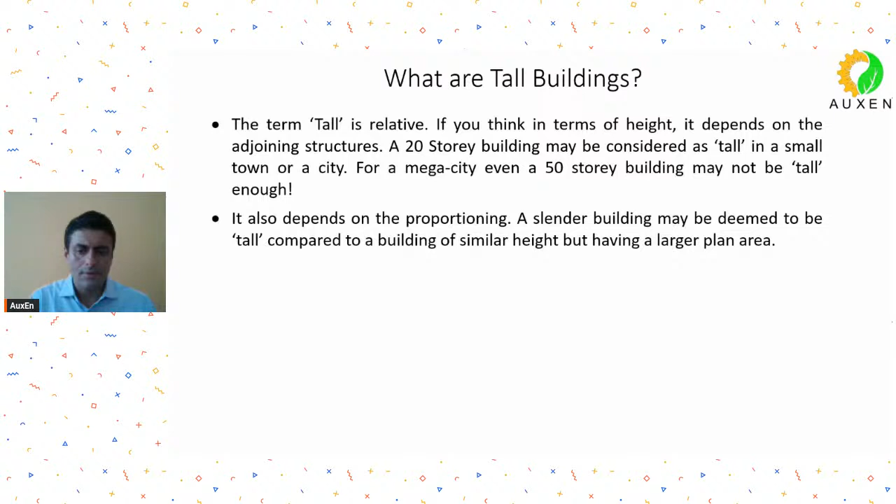Another set of understanding people have of whether a building is considered tall is whether or not any special system is being used in the building. What is the meaning of special systems? So you might have heard about damping systems to dampen the wind and seismic responses. So whether or not you are using any special systems may also sometimes decide whether your building is tall. Although I don't agree a lot with this particular definition as such.

The most important and, I would say, relevant definition will be that usually we will call a building tall when the lateral loads start to dominate over your gravity loads. So this, I would say, is a more relevant and more appropriate term when it comes to tall buildings.

So usually we will call a building tall when your lateral loads dominate. The two lateral loads that we will have to consider for our tall structures are wind and seismic. Obviously there will be other loads also, there can be some snow loads or other effects, but mainly we will be sticking to the wind and seismic effects. So we call a building a tall building when the lateral loads start to dominate.

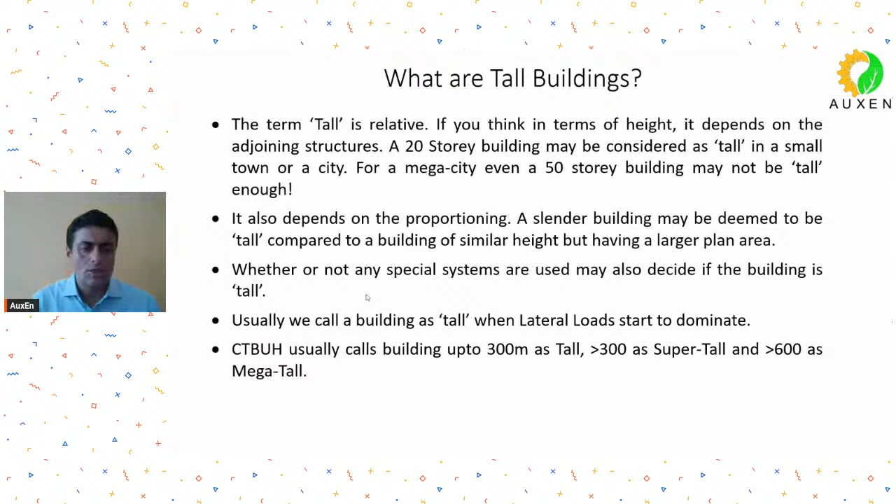Now there is a council called the Council on Tall Buildings and Urban Habitat, CTBUH. It makes some further classifications, and it says that up to 300 meters it calls buildings tall buildings. Then, more than 300 and less than 600, it calls them, I don't know what. Yeah, super tall. So if you have a building between 300 and 600, it will call it super tall, and more than 600, it usually calls them mega tall.

Okay, so this is a classification that has been put forth by the Council on Tall Buildings and Urban Habitat, CTBUH. You must visit their website. It is quite informative, and it gives you a lot of data about the tall buildings that are there in different countries right now. It also gives you a lot of data about what structural systems were used, who were the structural designers, who were the architects, some pictures, etc. So you may be interested in visiting their website also.

So important for us will be that we will call a building tall when lateral loads begin to dominate, and not just lateral loads, but the dynamic effects of lateral loads begin to dominate. That is when we will call them tall buildings. And how are they different then? We have understood what tall buildings are, but how are they different?

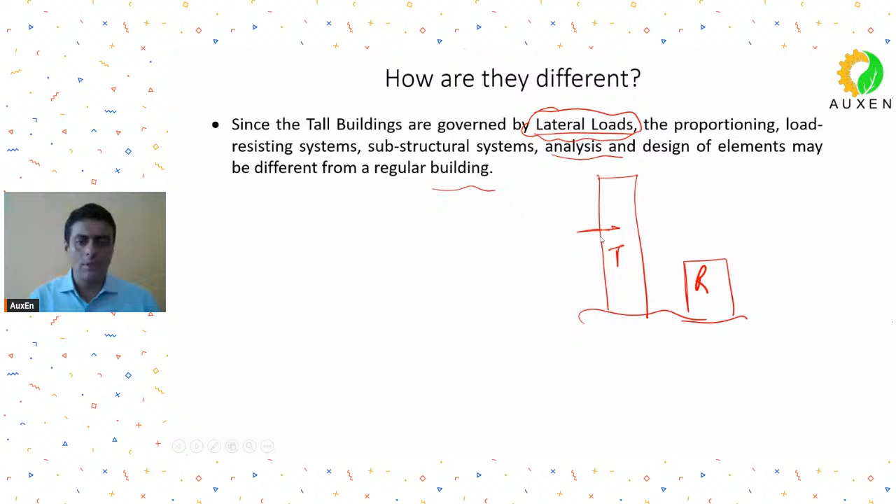So mostly when we are doing any regular structure, it is the strength design that is more important, isn't it? By strength design, I mean how much stress levels we can permit, what size we have to provide so that the load is effectively taken. On that basis, we decide the sizes, reinforcement, etc. So generally, it's the strength design in regular buildings that is important.

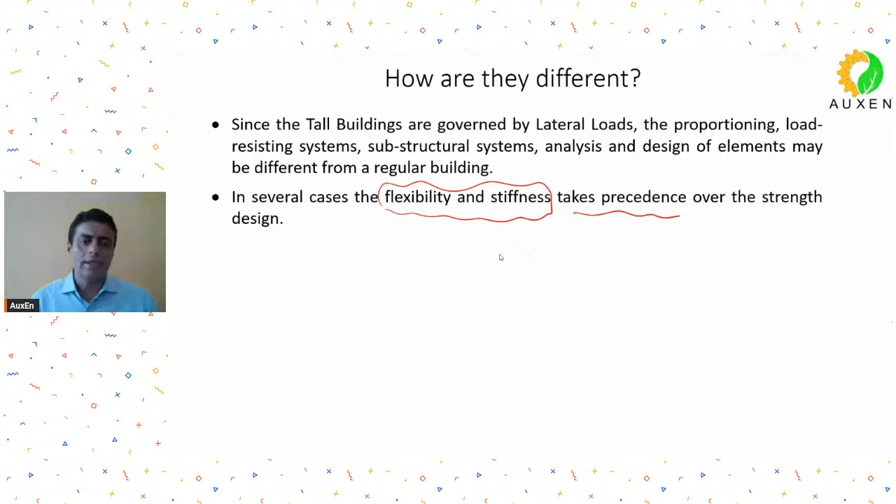But when it comes to tall buildings, the flexibility and stiffness of your structure may sometimes take precedence over the strength design. That means that sometimes you may have to provide sizes just to satisfy issues related to, let's say, floor acceleration, or drifts, displacements, etc. So the flexibility and stiffness design may take precedence over the strength aspect of your design. And as I told you, in tall buildings, the dynamic effects will become more important, and they have to be carefully evaluated and considered.

How are tall buildings different? So you may have to think about materials having greater strength, materials that have different properties, and materials that can be used for easier and quicker construction techniques. So for example, concrete, we may have to use higher grades.

So it's quite usual to see M40, M50, M60, M70 and so on, high strength grade concretes being used. You may see a lot of self compacting concretes being used in these types of structures, because of the large reinforcement congestion that you may get in those sizes.

Just give me a minute, I'll be back.

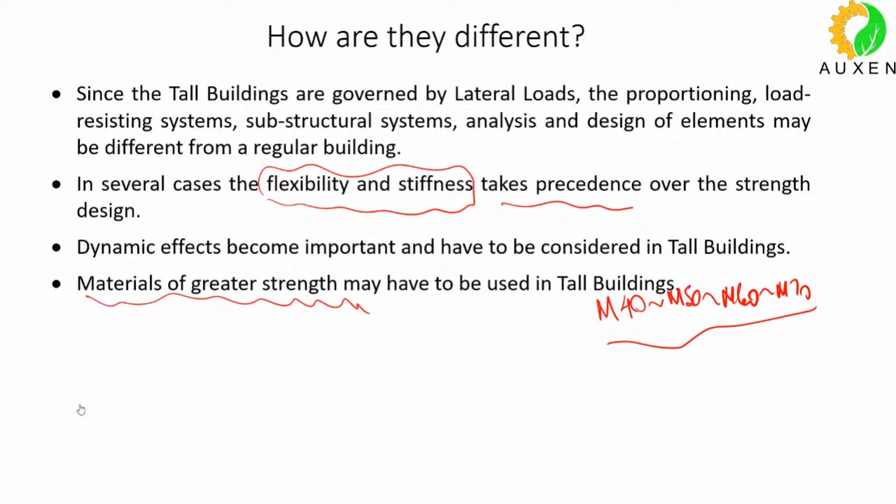Yeah, so I was telling you that you may have to use high strength concrete sometimes. You may have to use self compacting concrete due to large congestion in your sections of tall buildings. So materials of greater strength, materials which suit your construction techniques, may have to be used in these types of buildings. And tall building construction may require innovative construction methods that may not be used for regular buildings. So in this manner also, a tall building may be different from a regular building.

Okay, why may we have to think of innovative and different construction techniques? Because time is at a great premium. If you have to construct an 80-story tower, you obviously have to come up with construction techniques that are easy, repeatable, and quick. So these types of construction techniques also have to be thought of when you are doing these tall buildings.

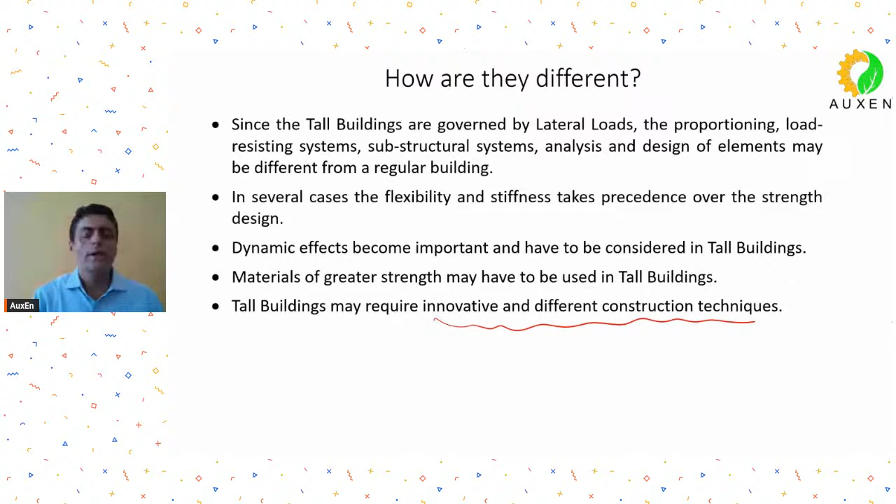Okay. So in this manner, I will say that when we have to think about tall buildings, there are differences. Now, what is happening in India? Before going to India, I would say the construction of tall buildings has been going on in the United States for almost, I would say, around past 125 years.

So, when was the Empire State Building constructed? Empire State Building, anyone? Empire State Building, if you have heard about. So, Empire State Building, which is what, around 100 stories plus. So, that was constructed in which year? Anyone in the live audience, if they can tell us? So, as far as I remember, your Empire State Building in Manhattan, New York, was constructed, I guess, in 1931. No, no, not in 90s. 1931, almost 100 years ago. Okay, Empire State Building, 100-story tall structure, was constructed in Manhattan, New York, in 1931.

Before that, I don't know if you have heard, there was a building which is still there. Empire State Building is still there. There is a Chrysler building in Manhattan, New York, which was also, I guess, constructed sometime in the 1930s. Okay, so for 12 or 14 months, it was the tallest building, Chrysler, and then the Empire State Building took over, it became the tallest. And the Empire State Building was, I guess, the tallest structure for around 30-40 years, till your World Trade Center towers in Manhattan, New York, came up. Okay, so then they became the tallest. Then you had your Sears Towers in Chicago, which became the taller building.

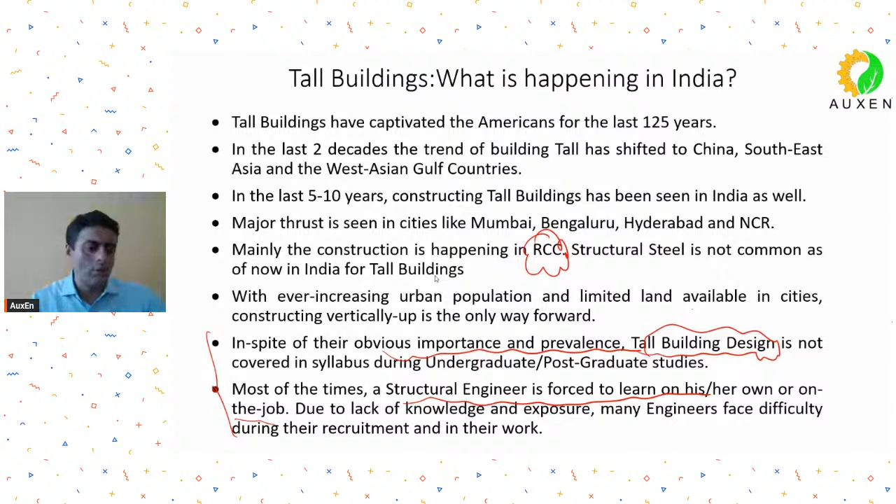So practicing engineers, working professionals like us, undergraduate and postgraduate students face difficulty because we have never come across these topics and we don't know how to address them. So that is why, and now I come to this, why we are going to start this course: this course will aim to provide a platform to have an in-depth understanding about the different design and detailing aspects of RCC tall buildings.

Through this course, we intend to explain and discuss the behavior of a tall building and the interaction of various elements of tall buildings, and we will go in depth in understanding a lot of different issues, a lot of different lateral load resisting systems that are adopted. So through this course, we will try to have very engaging discussions about these. So I'm telling you why this course, why we thought such a course should be conducted.

Through this course, we are also looking to explain and discuss the special analysis requirements that we may have to do sometimes for these types of tall buildings, and how to implement them in the software. And we will also have a wide, clause-wise discussion on the prescriptive code that you have on RCC tall buildings in the Indian context.

And then towards the end, we will take up an actual building. It will be a multi-tower podium project, and we will try to do it as it would be done in your offices or in your actual project. How to think about an actual project on tall buildings, that also we will discuss. So through this course, we are intending to address all these issues.

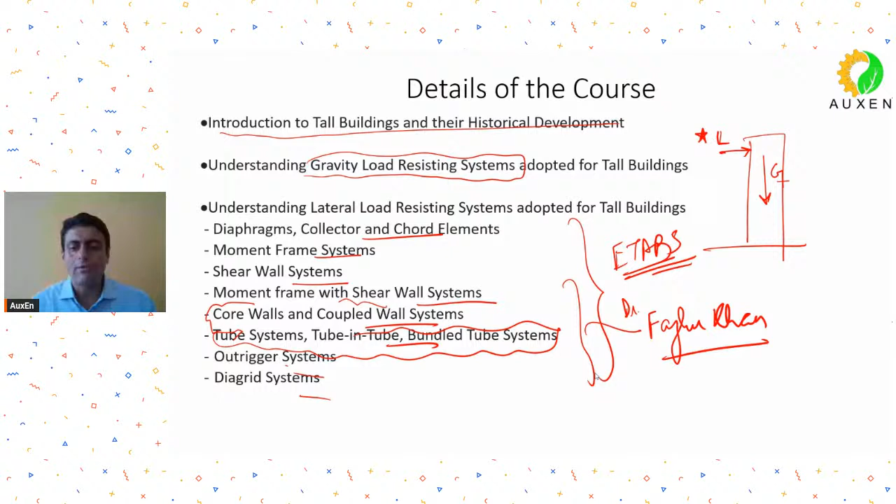So he was born in undivided India sometime in 1929. And in '47 it got partitioned into East Pakistan. So he was born in undivided India. He did his BE from IIEST Shibpur, Calcutta. Shibpur is near Calcutta. So that was before partition when he did his engineering from Shibpur, and then he went on to the US.

Then he went on to the US where he did his masters and PhD and whatnot, and then he started working at SOM, Skidmore, Owings and Merrill. It's a very famous company which specializes in tall building design, structural design, architectural design. So then he joined SOM, and there he developed all these different types of lateral load resisting systems. Mainly he can be credited with the development of tube systems, the tube-in-tube system, or the bundled tube system. These systems were mainly developed by him during his time at SOM.

So Dr. Fazlur Khan has got an Indian connection also. I think some of you have done some studies from Shibpur, isn't it, IIEST? Yeah, so you can be proud about your alumni who became a stellar engineer in the field of tall buildings.

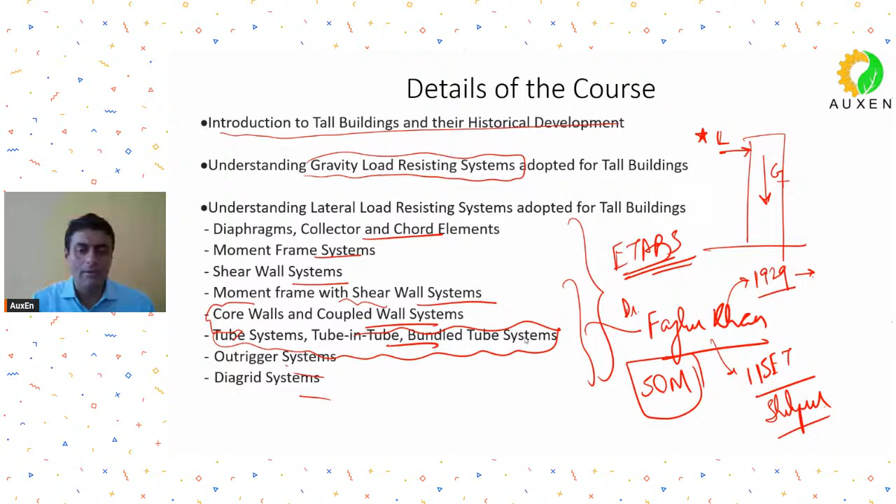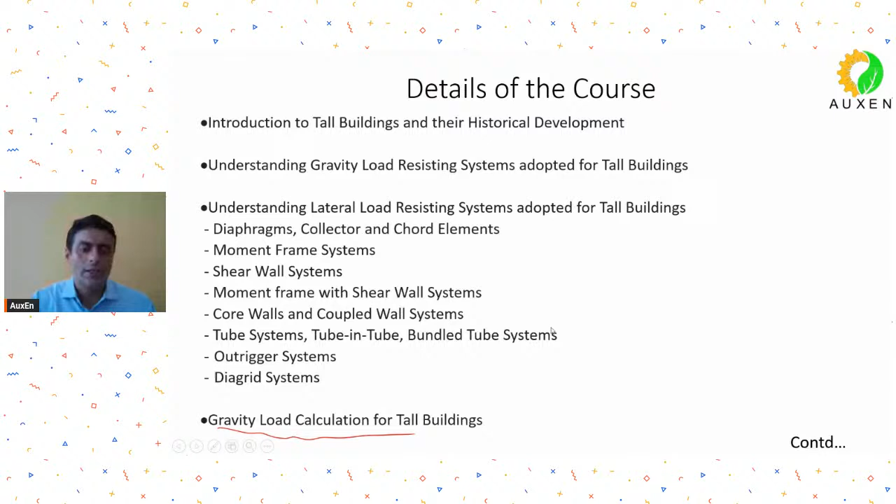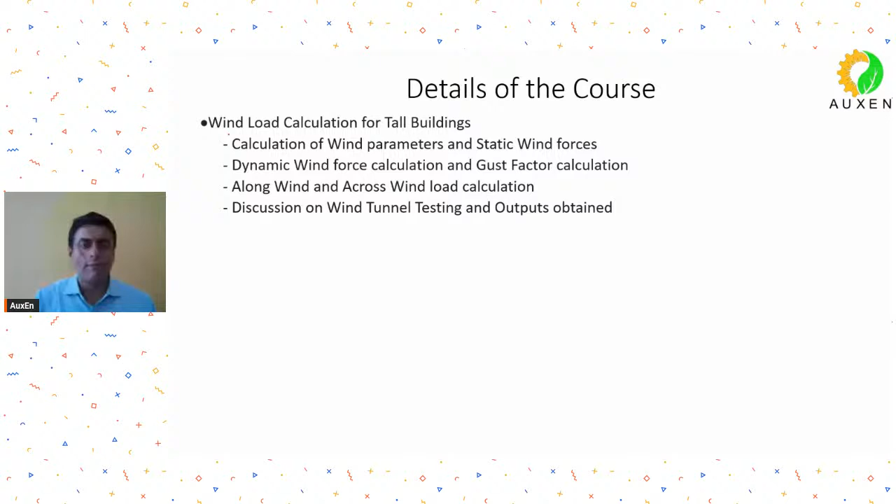I'll be talking more about this when we discuss these different types of lateral load resisting systems. Then we will go to the gravity load calculations for tall buildings, that will not be very difficult. Then we will go to the lateral loads, which will be important for us because lateral loads will play an important part. And in lateral loads also, wind loads are usually the more critical of the two.

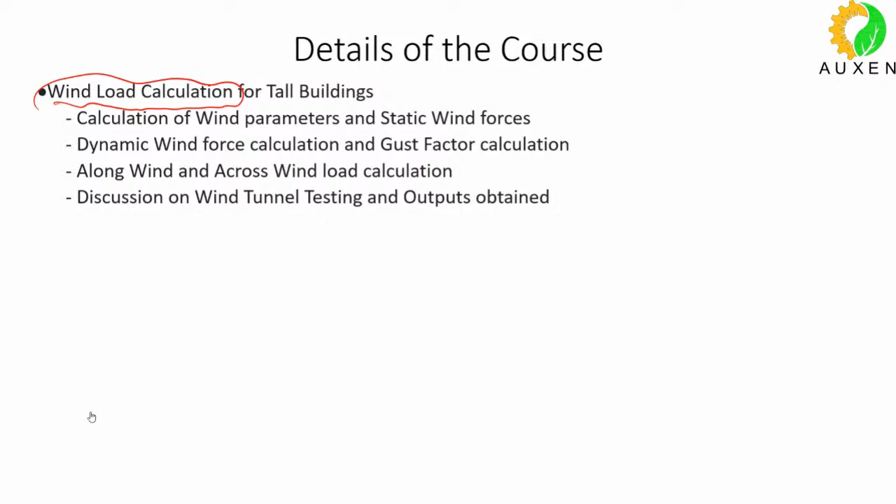So this is what we will be dealing with. In wind load calculation, we'll be looking into the calculation of wind parameters, static wind forces, then we'll talk about the dynamic wind force calculation, the gust factor calculation, how to calculate the along wind and across wind loads, and how to calculate the floor accelerations. All these things we will do.

Then we will see and have discussions on how wind tunnel testing is carried out. Obviously, we will not carry out wind tunnel testing, but we will discuss the concepts behind it. We will also discuss what type of outputs are obtained. If a wind tunnel testing consultancy is giving you some output, what type of output they give you, and how you apply those outputs as inputs on your structural models, that also we'll discuss.

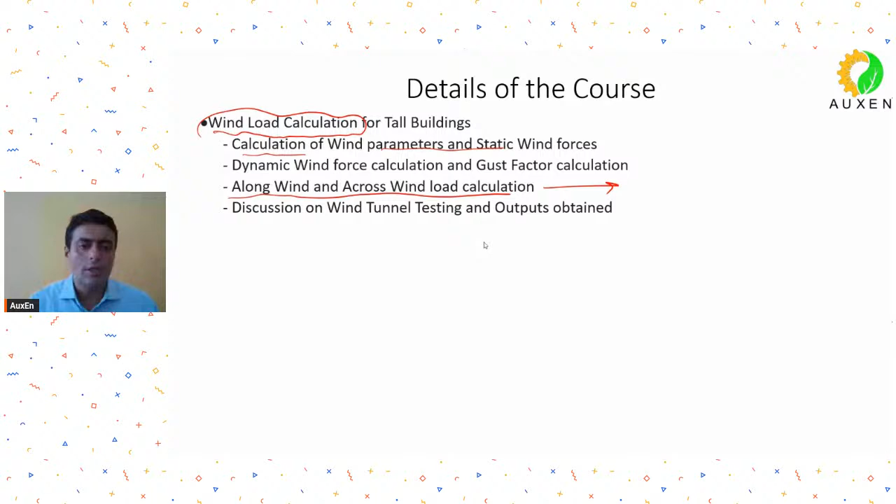Then we will go to the seismic load calculation, the other important lateral load. In this we will see the general seismic parameters, how to calculate them, how to understand them. We will have a look at the equivalent static method and the response spectrum method. We'll not be going too much into non-linear methods or time histories. We'll stick to the response spectrum method at best.

And then we will have some theoretical discussions also on performance based design, because when your structure does not follow the codal prescriptive limits, you may have to show by performance based design that your structure is going to behave in an intended manner, showing acceptable performance levels. So for that, usually we have to go for performance based design when your building may not follow the codal prescriptions. We'll have a discussion on this, not a lot of numerical calculations, but through some international documents.

Then we will have a clause by clause discussion on the code IS 16700 2023. We'll understand and discuss all these clauses.

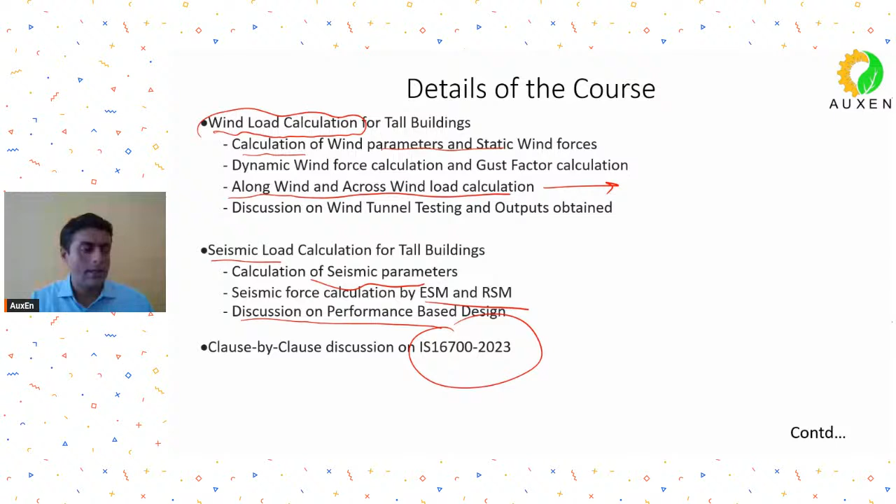Then we will have a discussion, which we will be doing on ETABS, about the analysis requirements, special analysis requirements that you have to have for tall buildings. Mostly they are the backstay effects, the effect of podiums, and how the shear reversal takes place when your podium slab is connected integrally with your towers, how to understand these backstay effects, how to understand that shear reversal effect, and what is the meaning of sensitivity analysis.

Not very difficult, but we'll do that. Construction stage analysis, what's the importance of construction stage analysis, why it is important, how you can do it, that we will discuss. Then we will have discussions about the effects of axial shortening of vertical members.

In tall structures, what happens is that under dead load itself, not even before live load, there are tendencies that columns undergo axial shortening. The problem is that when there is differential shortening, meaning some vertical members undergo axial shortening while others don't, things start to become complicated. So this we will discuss.

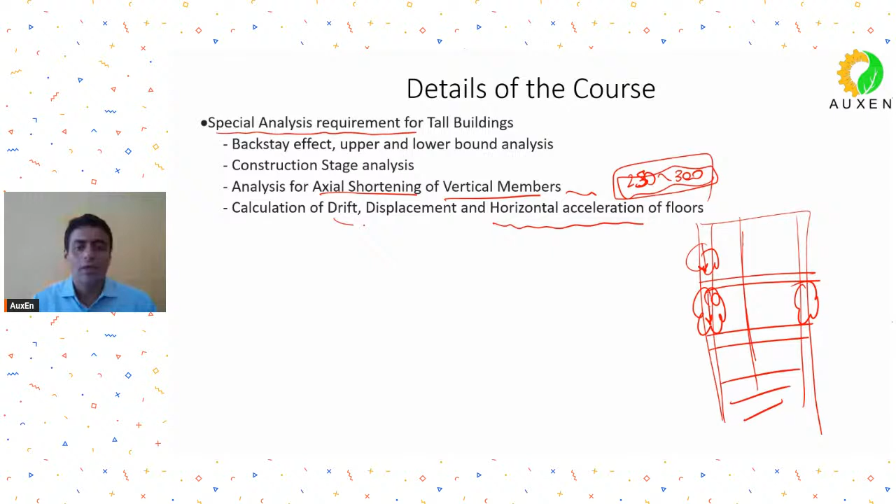Also, for horizontal acceleration, drifts and displacements you will obviously want to control, but when it comes to horizontal accelerations of floor levels, it becomes important and needs to be carefully looked into. This also starts becoming critical when your building height goes more than 300 meters. When I say building height goes more than 300 meters, I also should add the aspect ratio for it.

What do I mean by aspect ratio? In plan, if this is B and D, and in elevation this is my height, then h upon B or h upon D will be the aspect ratio. So when your aspect ratios start going to 7, 8, 9 and so on, then horizontal acceleration or the effects of dynamic loads start becoming more and more critical.

300 meters has been completed in Mumbai, but 300 meters in Mumbai has an aspect ratio of only 4. That means the height is 300 meters, but its plan width is, I think, some 90 or 86 meters.

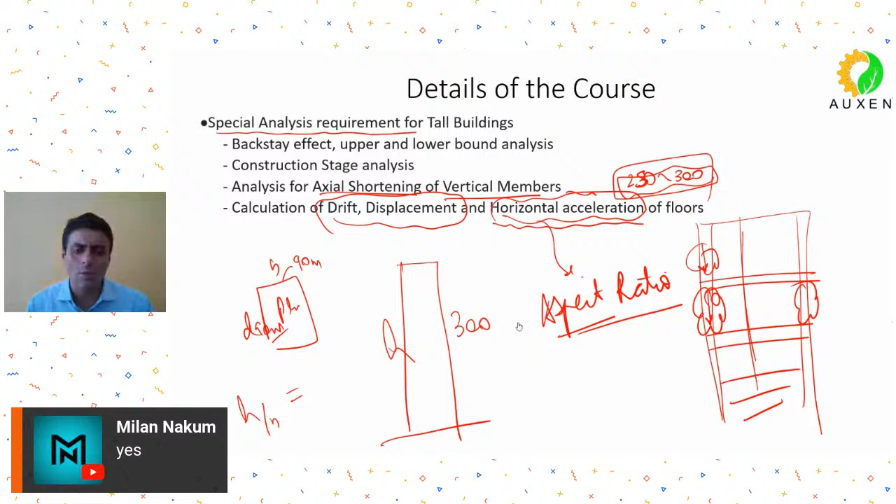The Palais Royal in Mumbai, done by Sterling Consultancy, has a plan size of 90 by 90, or it's actually an oval shape, so it has a very low aspect ratio. Even though the height is tall, because of such a huge plan size and such a low aspect ratio, these problems of horizontal acceleration or drift and displacement are not seen there. So it's not just tall buildings, but the aspect ratio that also becomes important.

I don't know if you have heard about this, it's called Steinway Tower in Manhattan. Very, very slim building, I don't know if you have seen it. Let me just search the name. Yeah, Steinway Tower. It has an aspect ratio of 24.

Aspect ratio of 24. It has a height of around 470 odd meters, and compared to that its plan size is only 50 or 60 feet. It's built on a very small plot size of, I guess, 40 by 40 feet or 50 by 50 feet, the kind of plot on which you would build a bungalow. They have constructed a 470-meter tall building on it. So it's a very, very thin looking tower having an aspect ratio of 24, which I think is the highest in the world right now.

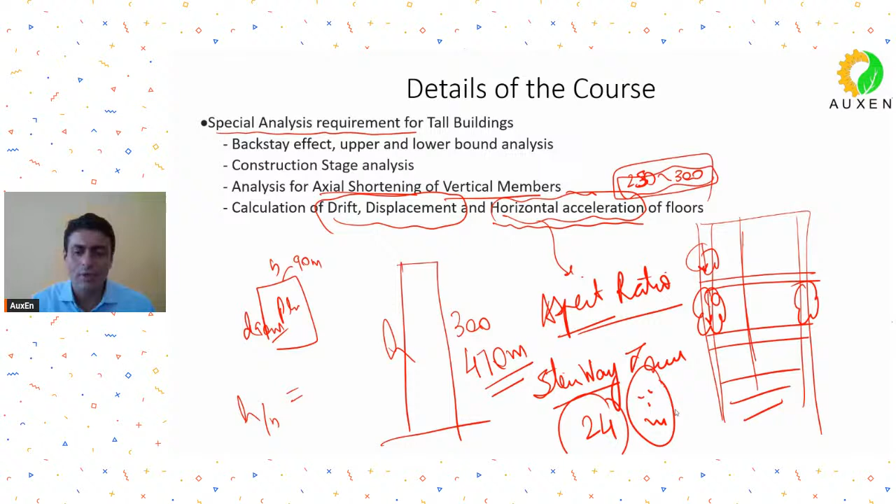And because of this, there are lots of issues which they had to mitigate, and they also had to go for damping systems. I think they have gone for a tuned mass damping system on their building, because otherwise you will not be able to control the horizontal accelerations, or the drifts and displacements, for such a high aspect ratio.

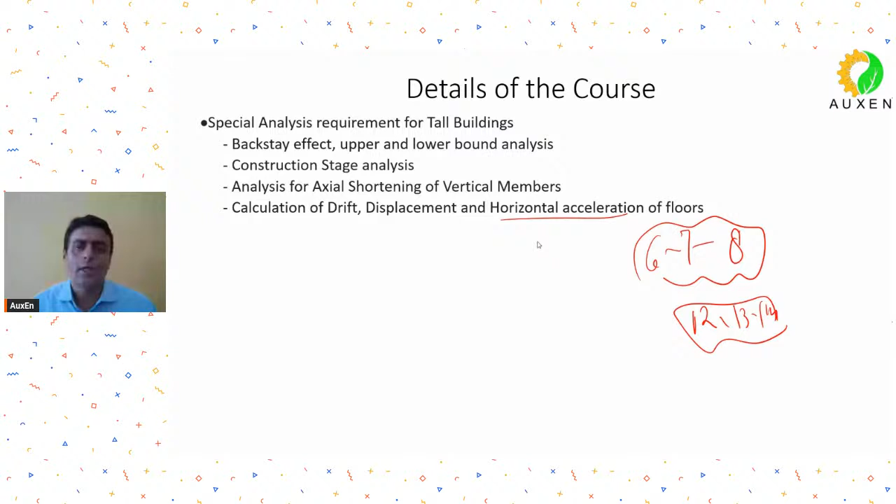So when your aspect ratio is around 6, 7, 8, you don't have to be very worried about these issues. But when you start entering an aspect ratio of 12, 13, 14 and so on, issues like horizontal acceleration and across wind response become more and more critical. Anyway, we'll discuss all these issues in detail during the course.

So once we do the special analysis requirement, then we will go for the design and detailing of different elements of tall buildings.

So we will discuss about the design and detailing of beams, columns.

We will discuss important issues related to diaphragms. Diaphragms are nothing but your horizontal slabs. So we'll discuss issues related to design of diaphragms, about chords and collector elements, how you ensure that the load is properly flowing through your horizontal system and is getting properly transferred to your vertical system. So through chords and collectors, we do that work. So we'll look into the design of these elements.

We'll also look into design of special elements like transfer slabs or transfer girders if you have, although not very recommended, but it's a reality that you have to do. So we'll discuss about this also.

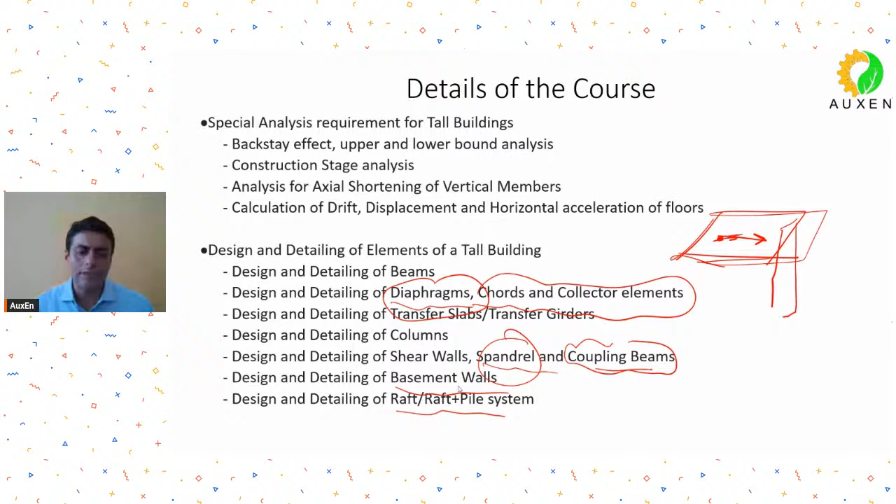Then we'll do discussion on columns, shear walls, and when you have got coupled shear walls, or when you have got shear walls where you have to leave openings, then you have to think about the spandrels, etc. When you are going for coupled shear walls, you have to think about the coupling beams also. We'll also discuss basement walls, because we'll be doing a project which will have basement. And for substructural system, we will take up raft and raft plus pile. So this also we will end up discussing.

And in the end, we will take one sample project, which will be a multi-tower project with a common podium slab and parking levels, and it will be a G plus 50 story type of a building. So when I say we will be doing this project, I don't mean that we'll be calculating each and every reinforcement, each and every column reinforcement, each and every beam reinforcement, but we'll be discussing how you will do such kind of project.

We'll make models on ETABS, we'll apply loads and all those things, but detailed design, making construction drawings, those things we will not be doing, because those things you can understand and do on your own also. But I'll be focusing more on how to make such models, how to plan the lateral load resisting system, how to provide all those elements, how to do the analysis, how to do the checks, everything.

Those types of things I'll be more interested in doing in this sample project. We'll not be doing the BOQ calculation, or the calculation for each and every column beam reinforcement, or make the reinforcement drawings. That type of work, I guess, all of you are capable enough of doing. I'd like to discuss more on the technical aspects of such type of a project.